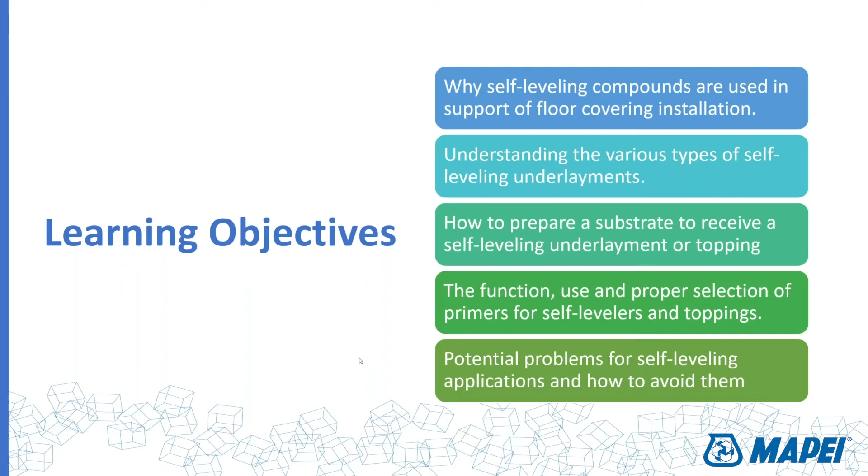So first and foremost, what is a self-leveling compound? This is a little bit of background information: it's either a cement or gypsum-based powder. When mixed with water or a polymer additive, it can create a flowable material like pancake batter, for lack of a better description, that can be applied to an irregular substrate to create a level, defect-free surface — all of which is extremely important for the installation of all types of flooring, whether it be resilient, carpet, ceramic, or wood. The flatter the floor, the easier the installation and the better the end result.

Typically, self-levelers are designed for high flow and long working times so that you can blend large areas together, and can be applied in ranges from a feather edge, to 1/8 of an inch, up to 2 inches, and sometimes 4 or 5 inches in a single application, depending upon whether or not you use an aggregate extension material. So it's a great solution for a wide variety of applications and circumstances for subfloor preparation — that's what self-leveling underlayments are for.

So first and foremost, why self-levelers? You may be wondering, why don't I just skim coat, etc.? The reason is — in my opinion, Jeff's rules, based on experience in the marketplace and working with contractors — there is no such thing as a flat floor.

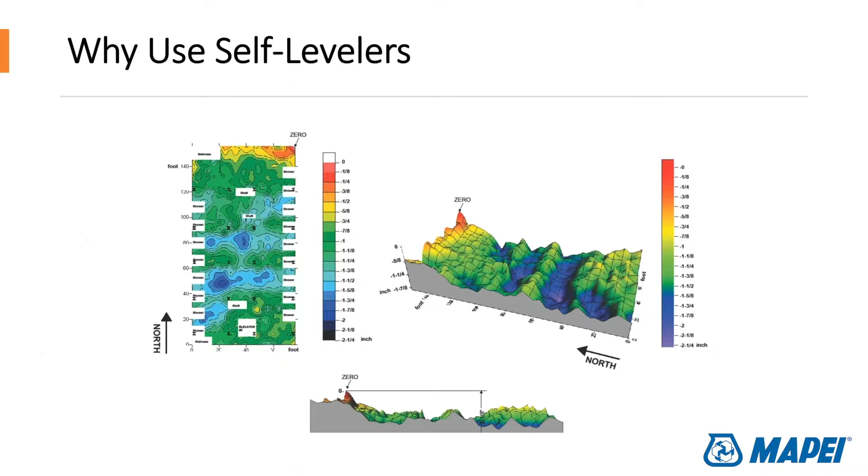But you might say, why can't I just skim coat that surface and be done with it? It's important to understand that skim coating, a very common practice in subfloor preparation, creates a smooth floor, not necessarily a flat floor. There are people who are very good at skim coat applications - they'll go across the floor with a 10-foot straight edge, mark out the bird baths and depressions, and come back with a hand trowel to fill those in. But at the end of the day, that's still not going to be a super flat, laser-level type of surface. It's still going to be undulating, versus a self-leveling application that makes things level. Skim coats make them smooth; leveling materials make them flat and level. That's the main difference.

Also keep in mind that skim coating is a time-consuming process. If you've done skim coating, you know you put one layer down, let it dry a couple hours, sand it, put a second layer down, let it cure another couple hours, and resand it. So there's a period of a day prepping a floor with skim coating compound - not to mention a lot of dust generation, cleanup, and being on your knees dragging material across the floor - compared to a leveling solution, which is a one-time application. The floor needs to be cleaned, then you pour it and place it, and it's finished and done, and you're installing flooring when it's ready. I think levelers are really a much better product for subfloor preparation going forward.

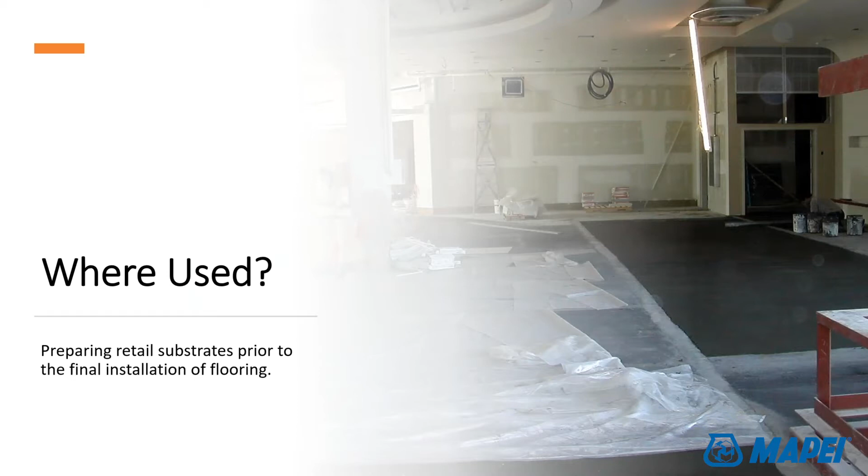Where are they used? They're used in a wide variety of applications: preparing retail substrates prior to final flooring installation, educational environments, gym rooms and classrooms, apartments, townhomes, condos, building out flooring installation. This photograph reminds me of a project in the Vancouver area - a residential tower project where the general contractor contracted with a self-leveling underlayment contractor. To save time in the installation process, he broom finished all the floors going up in concrete and had the leveler guy come by and finish them. We wound up with something super smooth, making it easier for the build-out - walls, doors, cabinetry installed without modifications. We saw great benefits doing that, versus having the concrete person finish the floor.

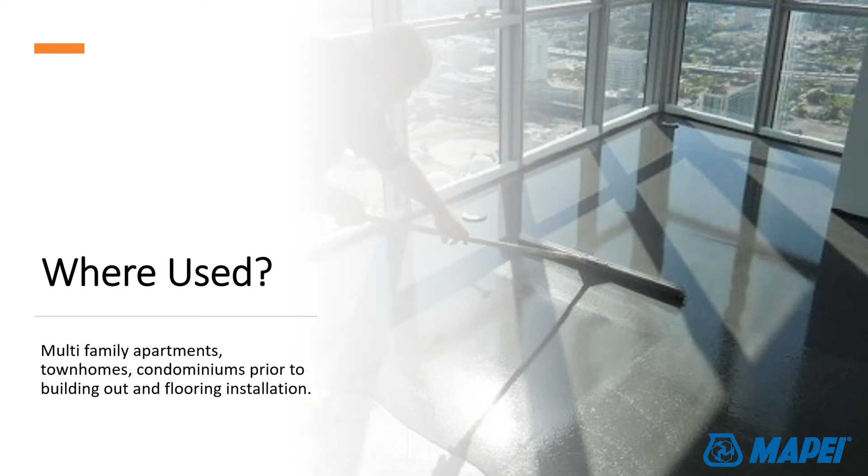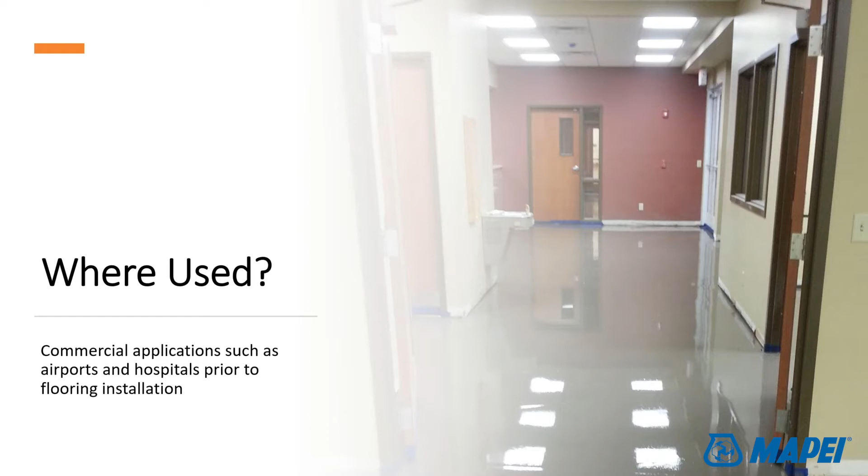Commercial applications as well, such as airports and hospitals, prior to floor covering installation. All of these applications have unique requirements in terms of what the self-leveling underlayment needs to do and withstand for the traffic conditions you're exposed to. For example, back to that residential application - if you're doing a home where you're just walking around in shoes and feet, the leveler needs to make things flat, but it doesn't need to stand up to massive heavy rolling load conditions. Like the screen you see here, a hospital environment - hospitals have extraordinarily heavy gurneys and beds rolling around on narrow wheels, putting a lot of pressure on the substrate. So you need something capable of withstanding that kind of pressure. Having said that, those are some of the points we need to discuss in navigating through all the choices for self-leveling underlayments.

So what are the various types of self-leveling underlayments, and where are they used, and what are the differences between them? Generally speaking, the world of self-leveling underlayment products is broken into three different kinds of chemistries. All of them are designed to be mixed with water to create a finished product, but they work from different chemistry bases to start with.

The first one we talk about is gypsum. This is a self-leveling underlayment that's very commonly used in multifamily housing because it has unique fire retardant capabilities, and it's a relatively inexpensive product that can be mixed with sand on the job site. One important thing to note: it's the same kind of material that would be used as a plaster cast on your arm if you broke it. Very fast drying, very tough and durable.

But one thing you must keep in mind with gypsum underlayments is that they are extremely moisture sensitive. They cure by evaporation—the water in the mix has to evaporate in order for a gypsum underlayment to function. It's not trapped like in a cement-based material, which we'll talk about in a second. It must totally evaporate. So if you're applying a gypsum underlayment in a thin application, say 1/8 or 1/4 of an inch, you'll have a relatively quick drying process. If you're applying it at 2 inches thick, all that water has to evaporate, and that can extend the dry time quite a bit—up to weeks before it's completely dry, depending on thickness.

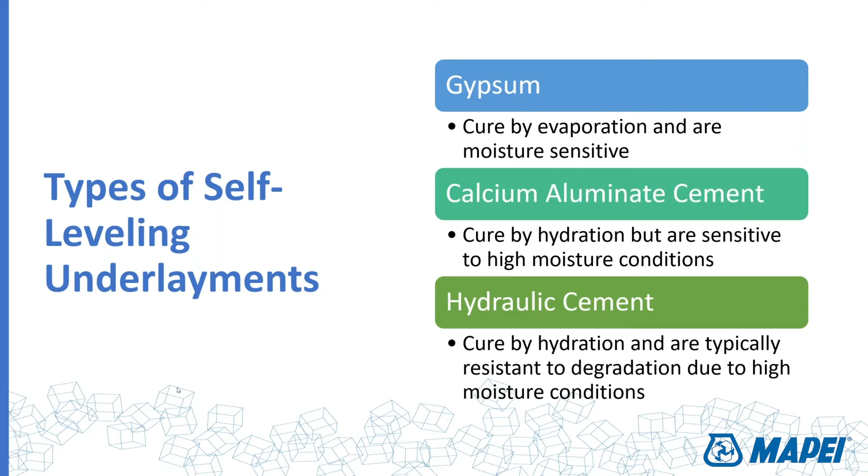And that's where hydraulic cement materials are used. This is almost the same as Portland cement. They actually cure by hydration and will get stronger on exposure to continued moisture. So those are the three types of cement-based products, or chemistries, used to make a self-leveling underlayment.

In the MAPEI product portfolio, we have products in all of those categories. When we talk about gypsum levelers, we have two in the product portfolio: Planitex SL and Planitex SLF.

Planitex SL is an unmodified, high flow gypsum self-leveling underlayment—extremely smooth and fluid to use, recommended for above grade applications on a wide variety of substrates. You can add sand to this to extend it, increase its performance characteristics, and reduce overall cost. We recommend adding MAPEI Sand Fine to this—a 40-pound bag of MAPEI Sand Fine mixes perfectly with two 50-pound bags of Planitex SL. Again, same great flow properties, easy finishing, and a great product for its intended use.

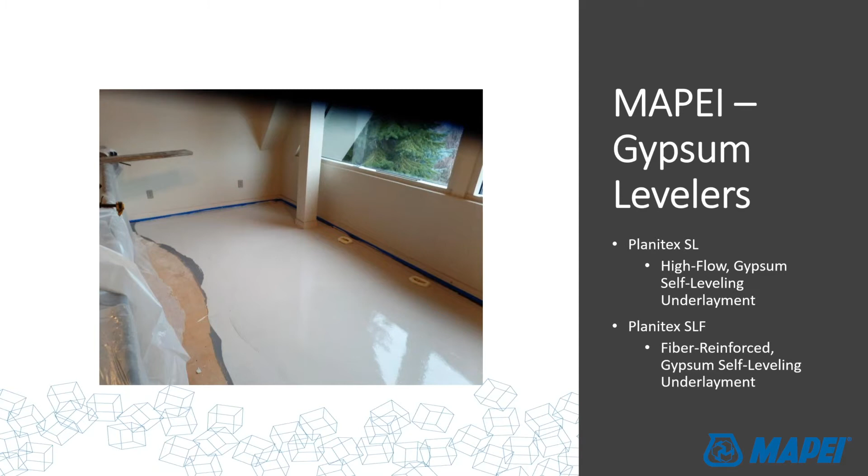Planitex SLF is based on the same gypsum chemistry, but is a fiber reinforced material. The fibers, if you look at them, are relatively long—maybe 1/4 to 3/8 of an inch in length—blended through the formulation, which makes this an extremely durable, flexural-resistant self-leveling underlayment. Again, perfectly designed for use on wood substrates as well as above grade cement-based substrates. So those are our two gypsum-based products.

As I mentioned before, in our calcium aluminate cement-based levelers we have the majority of our product portfolio, and we have quite a few of them here—almost, let me get my quick count, 10 self-leveling formulations in the calcium aluminate cement leveler base. Why do we have so many of them? Because there are a wide variety of uses, demands, and overall requirements for these products to work.

We begin with Novoplan SP, which is our standard performance self-leveling underlayment. This is a great product for base grade installation leveling applications, compliant with ASTM F710 requirements of 3,000 PSI or greater, a great price point, great flow properties, and a basic entry-level self-leveling underlayment.

We follow that with Novoplan 2 Plus, which is a little bit faster setting, a little bit more robust. Novoplan Easy Plus is a shrinkage-compensated leveler that doesn't require shot blasting or profiling.

Novoplan DPL is the deep pour leveler, a product we just recently introduced that can go up to 4 inches in a single application, which is incredible. There are people who have had needs to put self-leveling down up to 2 to 3 or 4 inches at a single time, and there are issues with other formulations being able to do that. This is specifically designed for deep pour applications.

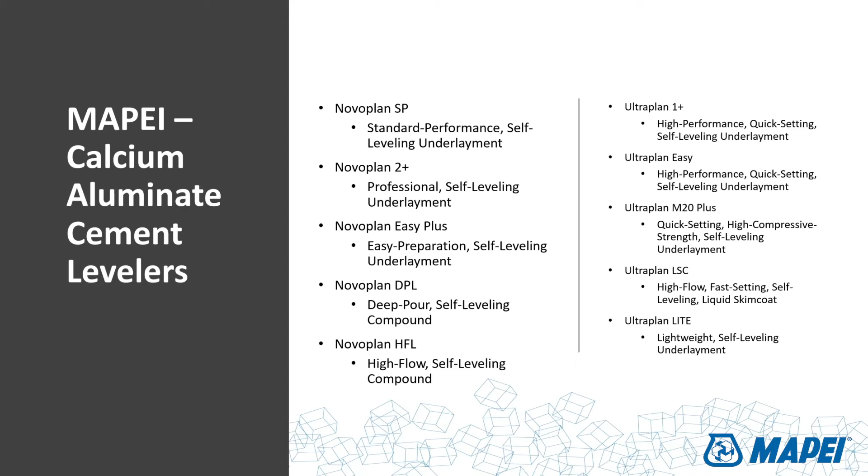The second to last category we have is hydraulic cement levelers, which would be our UltraPlan Extreme 2. This is a weather-resistant, high compression strength self-leveling underlayment that you can use in an uncontrolled environment—something that doesn't have doors and windows installed, where the HVAC systems are not operating.

It's a very robust leveler that we recommend for use in what we call go-early systems. Go-early would be an application in early construction, where the floor hasn't been fitted out and the plumbing and air conditioning have not been installed in the building. This is the only one we recommend for that kind of application.

You can install it and 6 hours later it could be rained on and nothing will happen. It could be flooded over by sprinkler line breakouts or whatever you want to call it—it's unimpacted. That's the reason UltraPlan Extreme 2 exists.

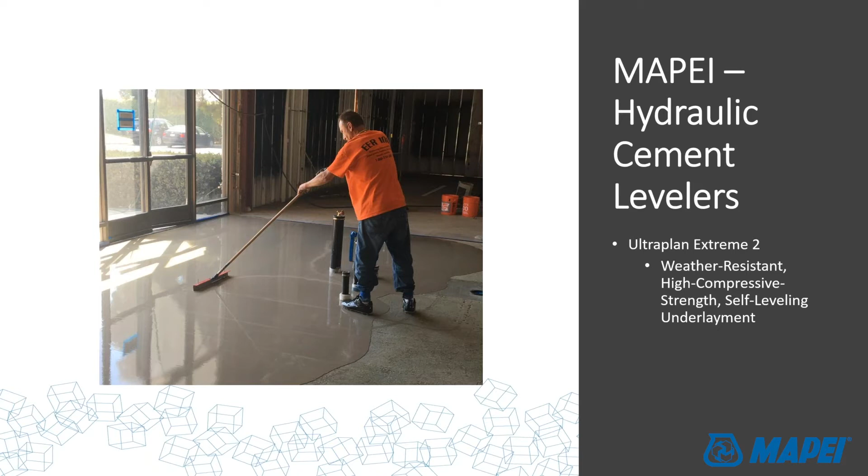The last one we have in our portfolio is Polyplan RSL. This is a unique product in that it's not mixed with water—we provide a latex additive instead. One of its unique characteristics is that it can be used directly on top of non-porous substrates without the need of a primer.

So if you're a contractor on the webinar today looking for primerless solutions—because primers take time to dry and are an additional step—Polyplan RSL is the way to go. They're extremely fast; this one, once applied, is ready for sheet vinyl installation 3 hours after application.

You can see in this photograph you can actually watch this one cure in front of your eyes. It happens about an hour and 15 minutes after application. The whole thing starts to gel over and harden up, and 2 hours later it's rock solid and ready to go. The whole goal on this one was for application directly over epoxy moisture control membranes without the need for an additional primer.

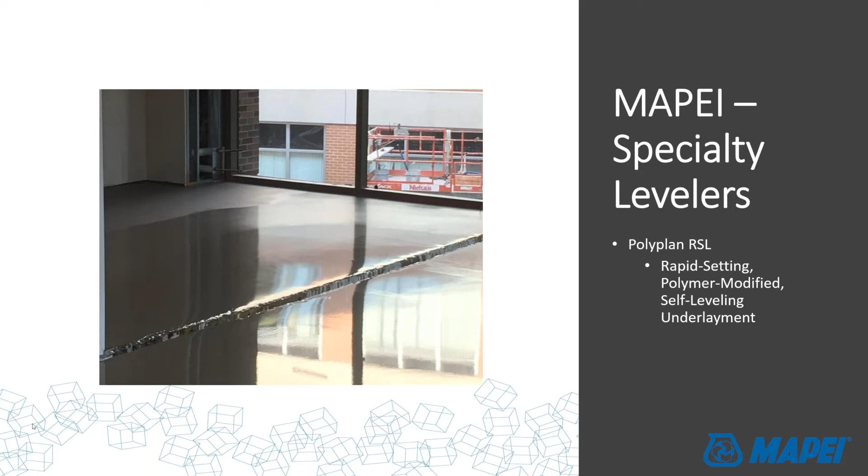So that is the last one we've got in terms of our product portfolio. So what are the differences between all of those? What we typically look for and observe, and some of the choices you'd want to make when selecting one leveler over another, are flow properties, dry time, compression strength, and depth of fill. There are a few other measurements on our technical data sheets, but I think these are the main four that are most important to you as the contractor or installer.

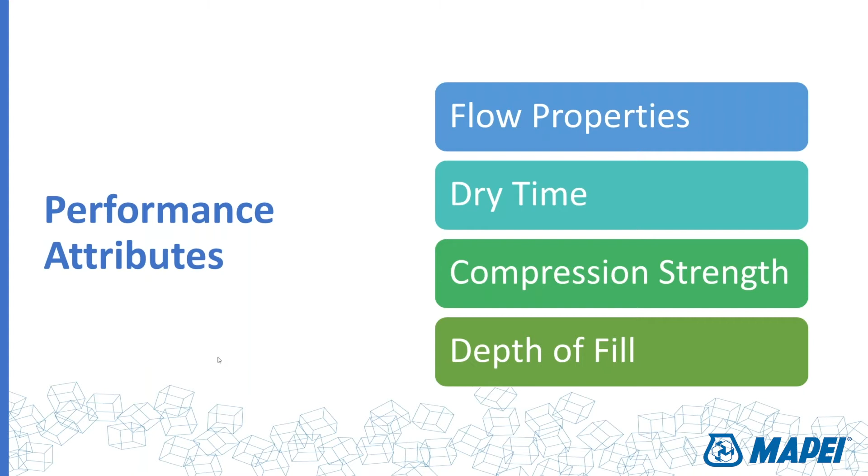Let's start with flow properties. Flow is a very interesting measurement - again, not something we typically publish on our technical data sheets, but something you need to be aware of. When we design and develop self-leveling underlayments, part of the design matrix for R&D people to work with is certain numbers of flow properties.

The flow property test in the lab begins with a small cup of mixed material, which is placed on a glass sheet. The cup is pulled out. The cup doesn't have a bottom to it, and when that cup is lifted up, all that leveler flows out, and we measure how far it flows across the glass sheet. So that becomes a flow measurement. Not only do we measure how far it spreads, but we also measure how quickly it flows.

So this slide gives you a visual representation of four of our products' flow properties. You're looking at Novoplan HFL, UltraPlan 1 Plus, Novoplan 2 Plus, and UltraPlan LSC. When I click the button for start, you're going to get a visual representation of how these things work. Hopefully that worked, hold on.

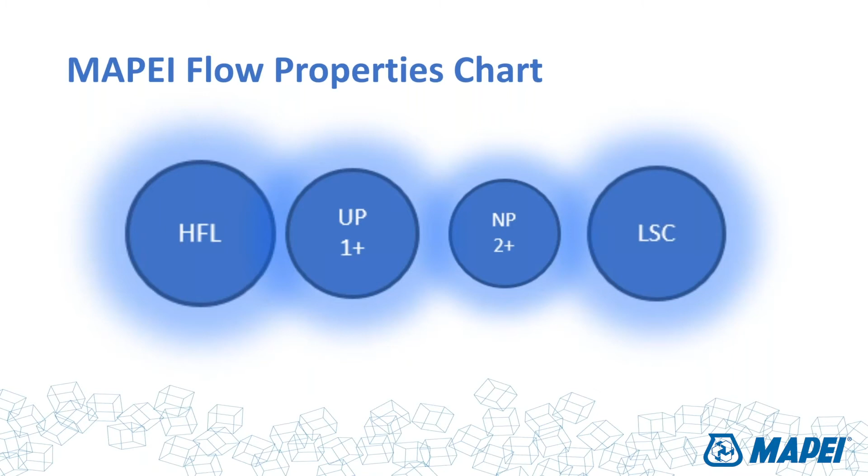Here we go. As you can see, the Novoplan HFL spreads quite rapidly to a much larger film versus UltraPlan 1 Plus, versus Novoplan 2 Plus, versus UltraPlan LSC. You get a little bit of a visual representation. HFL, as I mentioned before, the new one we've just added, is a very fast flowing fluid material and spreads quite a distance. If you don't need the speed and you're worried about placement and need to build thickness up, you might want to select Novoplan 2 Plus instead, since it's a little bit thicker, a little more difficult to spread versus UltraPlan 1 Plus. UltraPlan LSC has a very similar flow number to HFL, but it takes a little bit longer to get there. So HFL, very fast, very speedy.

Another important aspect of our self-leveling underlayments is the wait time before floor covering installation. Typically we give you two numbers: one is for the installation of ceramic tile or non-moisture sensitive flooring, and another is the time required for moisture sensitive flooring. The reason for those two numbers is that ceramic tile installation typically uses a mortar bed, and it doesn't really matter whether there's any residual moisture left in the self-leveling underlayment - it won't affect it so much, whereas that residual moisture would create a problem for a moisture sensitive floor covering or a water-based adhesive. So that's why we have those two numbers in place.

So here you're looking at a chart that shows the dry times or suitability times for many of our levelers for those two different types of floor covering. What I do want to mention - going back to the discussion about gypsum underlayments - the Planitex SL and the Planitex SLF have a kind of vague number there, and that's on purpose because it really depends upon how thick you apply it. If you apply it at a 2-inch thickness, that dry time is going to be on the order of 1 to 2 weeks before you can get on it with any kind of moisture sensitive flooring. You must let that product dry before you get to it. Again, if I'm down to a 1/4 inch or 1/8 inch application, that's a whole different number.

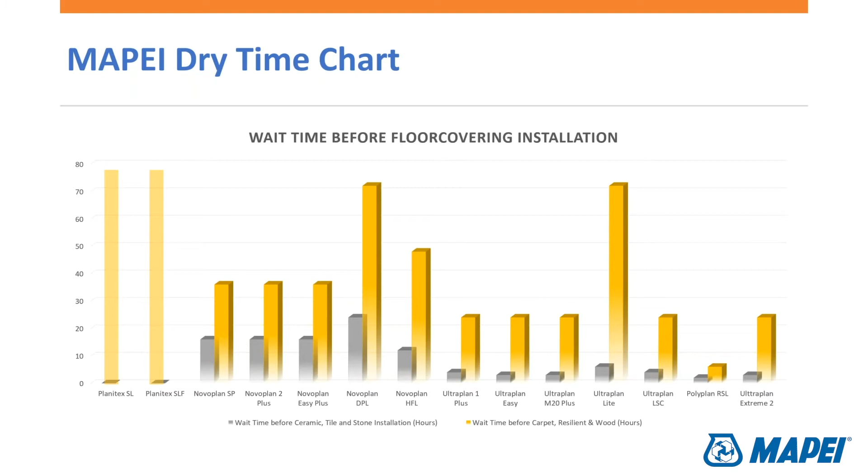Compression strength is another thing. What is the type of traffic conditions and heavy rolling loads that I'm going to be exposing the floor to? And again, if you take a look at the number that's provided by the ASTM F710 requirement, which is typically 3,000 PSI, virtually all of our levelers are above that number.

But if you need something to handle heavy rolling loads in a hospital environment, perhaps even in a casino rolling money across the floor in heavy carts, or a warehouse floor that you're running forklifts and hand trucks across, you would want to select ones that are higher compression strengths.

So surprisingly, and you may not think about this, our Planitex family has some of the highest compression strengths out of the whole family. So don't exclude the thought of using a gypsum underlayment on above grade installations just because they're gypsum. They are high performance products. They've got great flexural strength and extremely high compression strength and are very easy placement products to deal with.

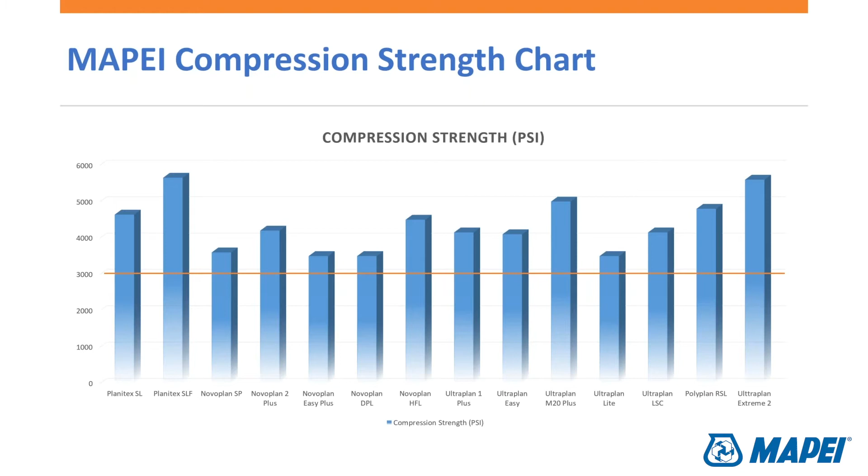Keep in mind that they do have that time constraint for dry time, so you have to dial that into your equation. Obviously, the UltraPlan families are a little bit higher compression strengths than the Novoplan families. We're getting a little bit fuzzy with UltraPlan. Novoplan HFL is a high compression strength product. But again, these are some of the attributes that you would consider in terms of navigating which type of leveler to pick.

Depth of fill is another important aspect as well. And again, single lift application ranges for our levelers. This number is given to you as if you were going to apply it neat. In other words, you're not mixing it with any aggregate. It's just the product by itself. And we typically do limit the application of these products to certain depth of fill for a reason, most of which has got to do with the heat generation during the curing process.

Many of these levelers, all of these cement-based levelers, do generate heat as they cure. The thicker you apply it, the more heat is generated, and we're trying to avoid having that heat create a situation where the leveler expands too much and blows off the floor.

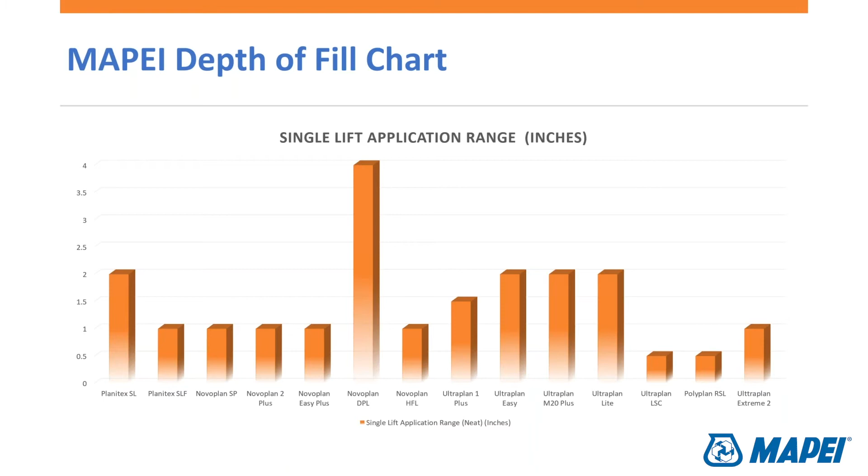But here you'll see the depth of fill for these levelers in their neat application, all of which can be extended with aggregate up to 5 inches of fill based on how much aggregate and the size of aggregate that you're using, with the exception of UltraPlan Extreme 2, PolyPlan RSL, and Novoplan DPL.

All right, so preparing the job site is important for all of these levelers. If you're dealing with concrete, you must check for moisture content using ASTM F2170 and ASTM F1869.

This is one of your navigational points, if you will, for determining which leveler I can use. Most of our levelers are set up for a limit of 5 pounds and 80% RH. Novoplan HFL is a new one introduced at 8 pounds and 90%. Ultraplan Extreme 2 has no limits. So you've got to make sure you're doing your proper testing for that.

Check for structural integrity. If the floor has additional flex beyond L/360, you're pretty much going to limit yourself to looking at Planitex SLF that has the ability to handle that flex. But you want to make sure your substrate is strong enough to support what you're dealing with.

Check for the presence of curing compounds, sealers, and other contaminants. This is a big problem for self-leveling underlayments. Those curing compounds must be removed, and you're dealing with a pure surface to stick to. Primers and levelers bond very well to curing compounds and sealers and other contaminants. The contaminants do not stick very well to the concrete. And so if you're trying to avoid hollow spots and delamination, all that stuff's got to be taken away.

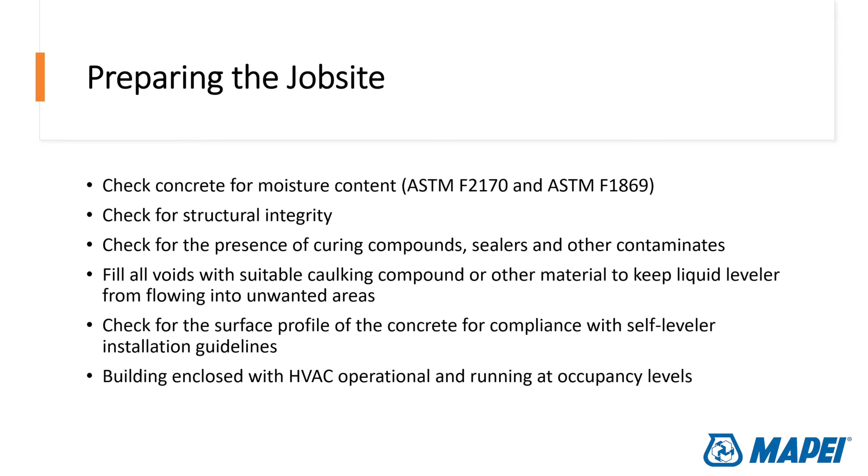Check for surface profile. Many of our levelers and primers require some sort of profile for functionality. Some do not. Any of our levelers that have the word easy in the name do not require a surface profile, but everything else typically does require some sort of preparation to a CSP of 2 or 3. And the building must be enclosed with an HVAC system operational, running at occupancy level. So all this stuff is important.

The types of substrates we deal with are concrete, and I refer you to the ASTM F710 standard. A lot of information is there for how that concrete needs to be prepared and set up. If you don't have this standard, I highly recommend you get to the ASTM website and find them. For wood, there is a standard practice for panel type underlayments to receive resilient flooring. That's another great one to have that talks about the type of wood being used, how it's supposed to go together, what kind of flexural strength needs to be involved, as well as a standard for gypsum. So all of these are very good to have in your reference file. If you don't have them, I would highly recommend you get them.

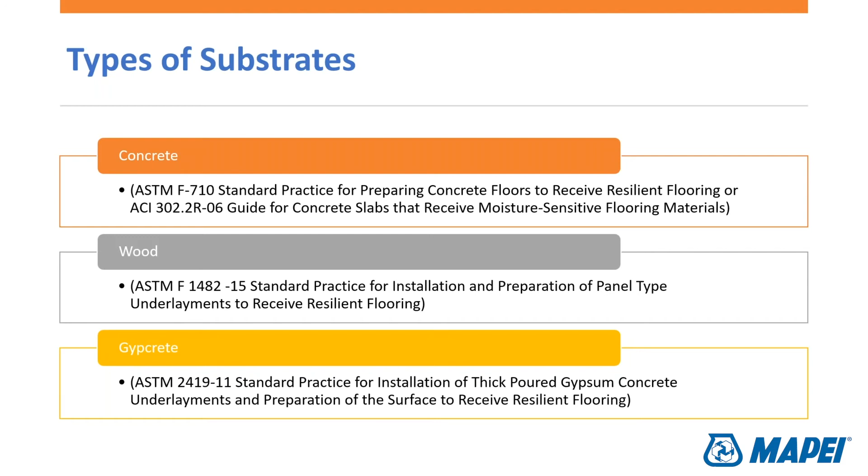There is, believe it or not, an ASTM standard practice for the installation of self-leveling underlayments and the preparation of the surface to receive resilient flooring. Again, another good standard to have in your box of resources when you're dealing with how to prepare them.

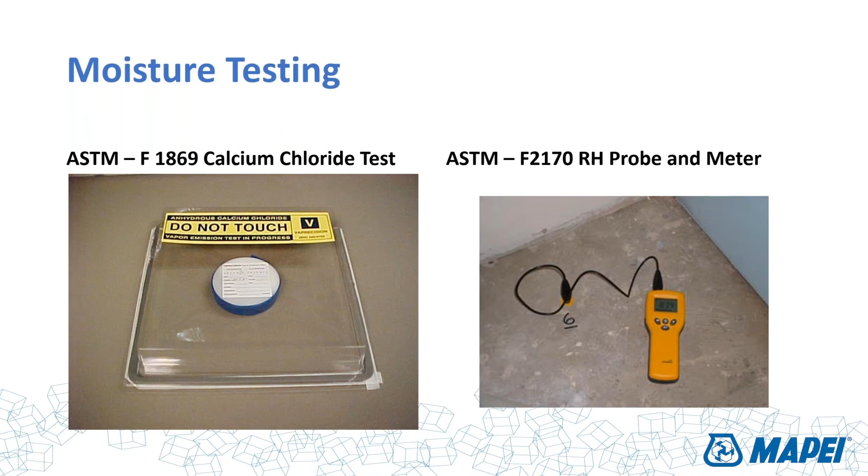Again, moisture testing is typically all done by these tests. I don't think we need to spend much time talking about them here, other than to say that these tests are worthless unless you properly prepare them, the HVAC systems are operational, and you're doing them according to the test method requirements. If you're trying to do an RH probe test and the walls are not up and the windows are not up, you're wasting your time. And the same is true for the calcium chloride test. These tests are only valid if the building is enclosed and the air conditioning is running. So do keep that in mind. But that is a navigation point for which leveler to use when you get that information.

If those results come back and you have a high moisture reading beyond the limits the leveler can take, then you've got to consider the installation of a moisture mitigation system. That's for another presentation as well. But generally speaking, there are a couple choices: a 2-component 100% solid epoxy system, our Planiseal VS and VS Fast, which are ASTM F3010 compliant. If it's not super wet, you can use some of our 1-component water-based polymer solutions for mid-range moisture conditions like Planiseal MSP. And in some conditions you can also use our 1-component polyurethane system, Planiseal PMB, as well.

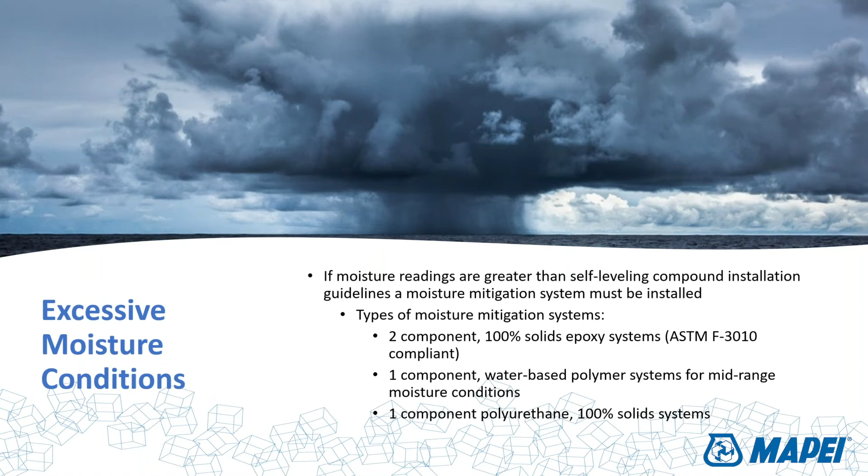So those are the solutions for getting that kind of done. Creating the profile is extremely important, probably more so not just necessarily for creating texture, but to get the floor clean. Again, many failures that we deal with on a self-leveling underlayment application are due to improper subfloor preparation. A sealer was left on, there was oil residue left on the floor, taco sauce in a corner that spilled. These kinds of things are going to create problems for the bond of the primer. And when that is a problem, then we have a failure.

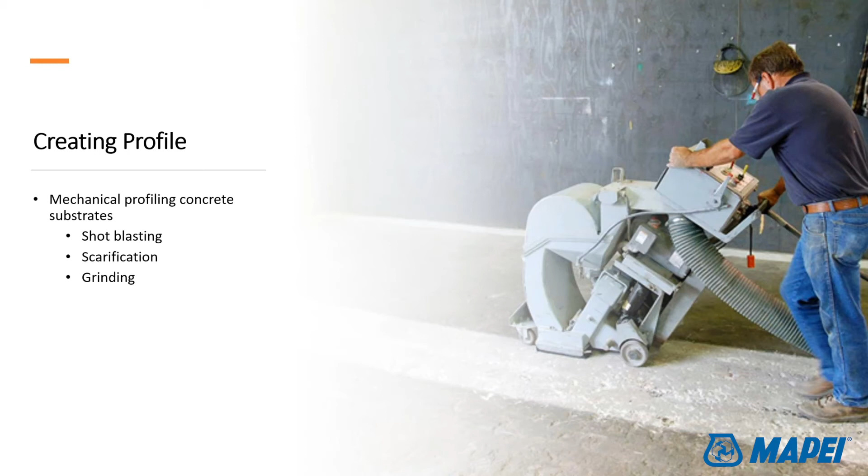So there are a variety of methods for creating that profile. Our International Concrete Restoration Institute has got some great recommendations. If you look for that chart and that information for self-leveling, we're trying to get to a CSP of 3 or 4 for most of that. Look at our technical data sheets. I think for the most part, we're looking at a CSP of 2 or 3. All of which can be achieved by grinding, shot blasting, sandblasting, and scarification.

A little bit of a myth correction, if you will, for MAPEI. Sometimes I've been told that people believe that our only solution for preparation of a concrete slab is shot blasting. That is not true. We recommend and endorse grinding, shot blasting, sanding, whatever, as long as it achieves that CSP requirement that we're requesting and that it's properly cleaned and there's no dust residue left on the floor, we're perfectly good with that. So do keep that in mind, that there's a variety of different methods for preparing a floor to receive a self-leveling underlayment.

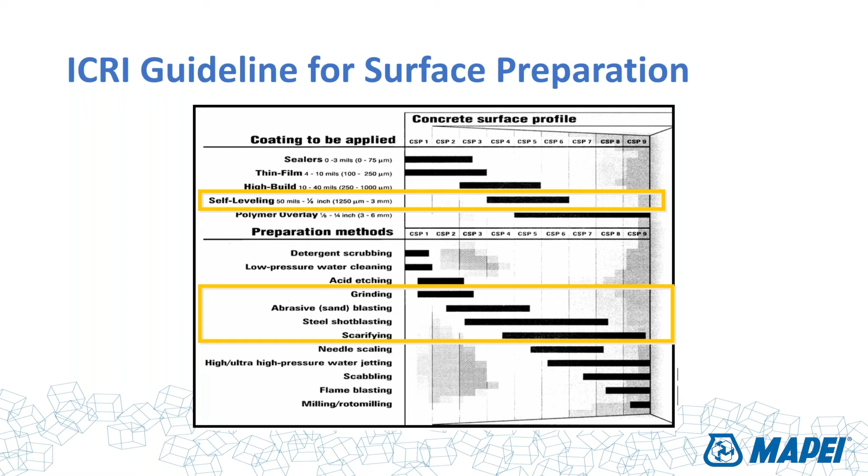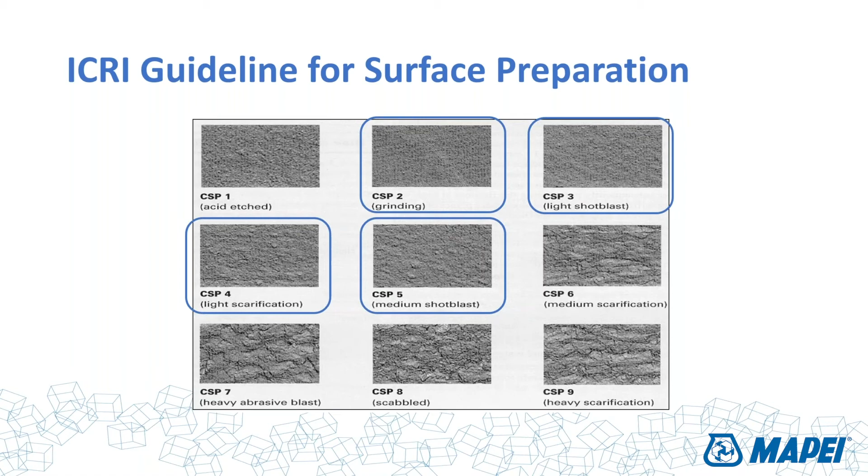At the end of the day, your concrete needs to be clean, pristine, and looking like, I don't know how to explain it other than it looks like 100 grit, 120 grit, or 80 grit sandpaper on the floor. Some clean texture for which everything needs to bond to. Cracks also need to be repaired, as I mentioned before, purely because of keeping the leveler from flowing through that concrete crack into the areas below. That's not a good situation. And sometimes these cracks are structural and need to be addressed as well.

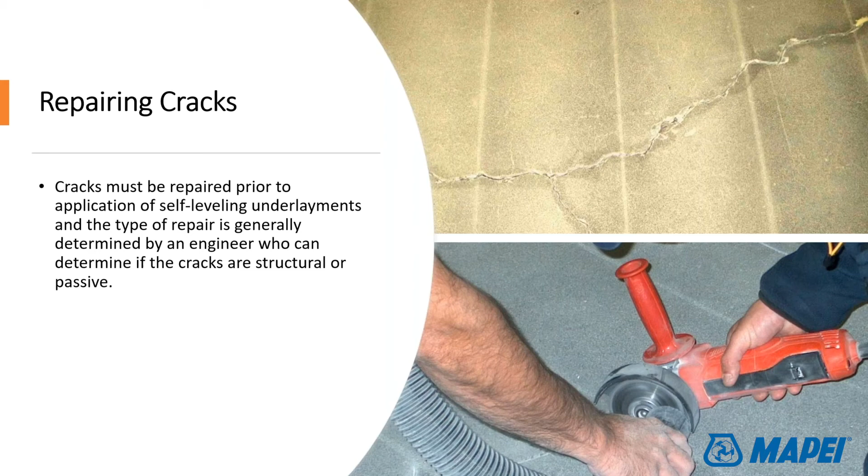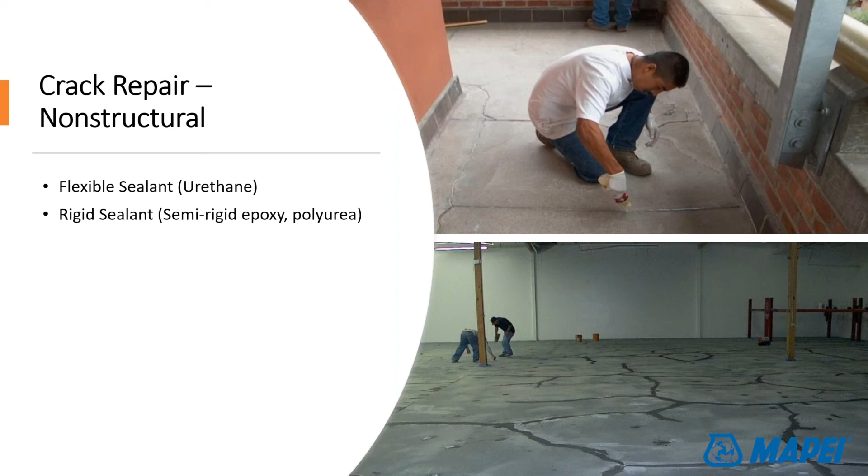So whenever you get on a concrete slab that has cracks throughout it, a structural engineer should be involved to take a look at that and see whether or not they are active cracks that need to be dealt with in a unique way, or if they're just cracks that can be fixed with normal application, normal remedies. If it's a non-structural type of repair, you can go into that with a flexible sealant. Semi-rigid, we have things like Planibond JF to fix some of these. Planibond EBA with sand can be used for this as well. Sometimes they can even be filled with a patching compound prior to the application of a leveler if they're non-structural. If they're structural and are moving joints, then we need to figure that out a little bit differently.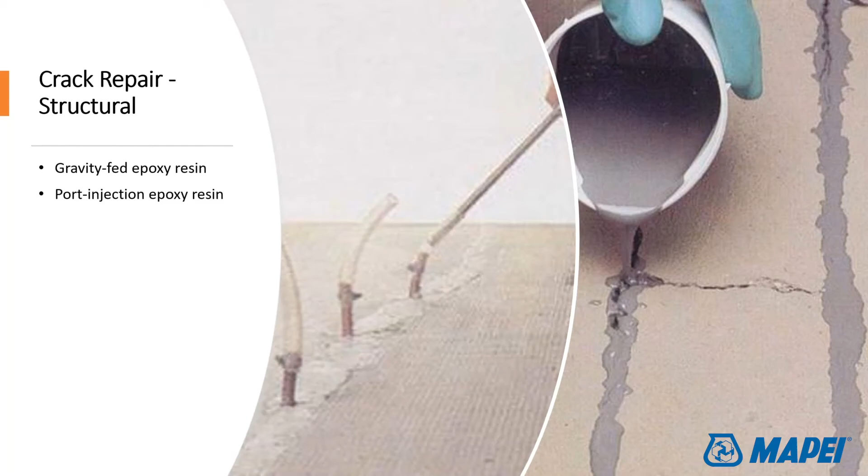Gravity fed epoxy systems, port injection epoxy, all this kind of stuff to lock that together to make that a suitable substrate for bonding a leveler. Again, these things need to be reviewed and dealt with by a structural engineer to make sure that that is the right solution for what you're dealing with. So, having said all that, how do you navigate through the choices of self-leveling underlayments for your particular project? Just like a buoy is a navigation point for your sail on the ocean, what are some of the buoys that you have for self-leveling selection?

As I mentioned previously, if your project is not fast tracked and you have time and you're working on a budget, to be honest with you, then you could look at our Novoplan family or our Planitex family, which is a little bit slower setting, a little bit more generous and forgiving to the wallet, if you will, as opposed to something else. If your project requires a rapid turnaround, then you're looking at our Ultraplan family.

If your project has weight load issues, if you're dealing with a cantilevered concrete slab or an old antique concrete slab that's not capable of taking the full load of a 2-inch normal self-leveling application, then you would take a look at Ultraplan Light for that application. If your project is going to wind up being a warehouse floor straight with no other floor covering on top of it, our only solution for that is Ultraplan M20 at this point.

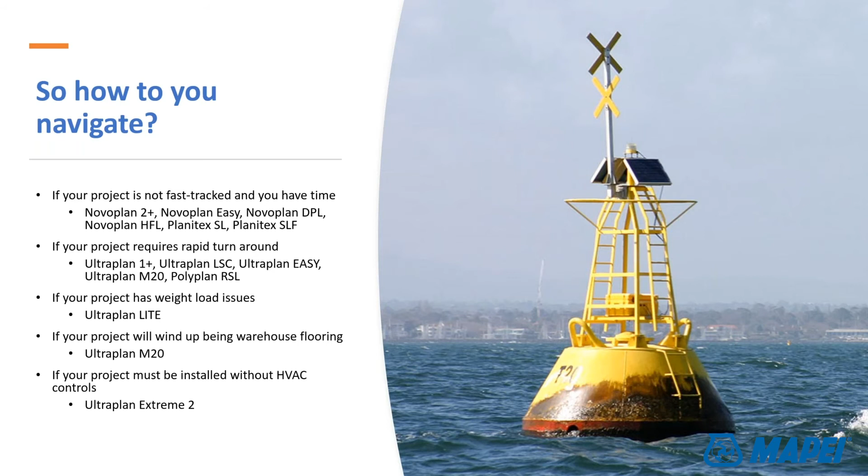If your project is installed without HVAC system controls, or the windows and doors aren't in, and it's a wide open building, even if it's going to be curtain wall type construction, and you need to get the slab straightened out and the glass isn't up yet, your only solution for that is UltraPlan Extreme 2.

If your project is wood-based and has flexural issues, or if you're dealing with an existing multifamily housing project with a 2-inch pour gypcrete that's cracked up and looks like the surface of Mars, Planitex SLF is the perfect solution for that.

If your project is over an epoxy membrane and you don't have time for the primers to dry, then Polyplan RSL is your solution. If your project requires a deep fill application, then Novoplan DPL is the way to go.

If your project is exposed to heavy rolling loads, you're looking for products that have high compression strength. So any one of those products will work for that.

If the project has to be done in 3 hours or less—which, if you're thinking about an operating room rehab, for example, in a hospital environment that requires moisture mitigation, and they need to get that operating room back into service because that's a big money maker for the hospital—Polyplan RSL is the way to go for that as well. Okay, so those are some of the navigational points for self-leveling underlayment selection.

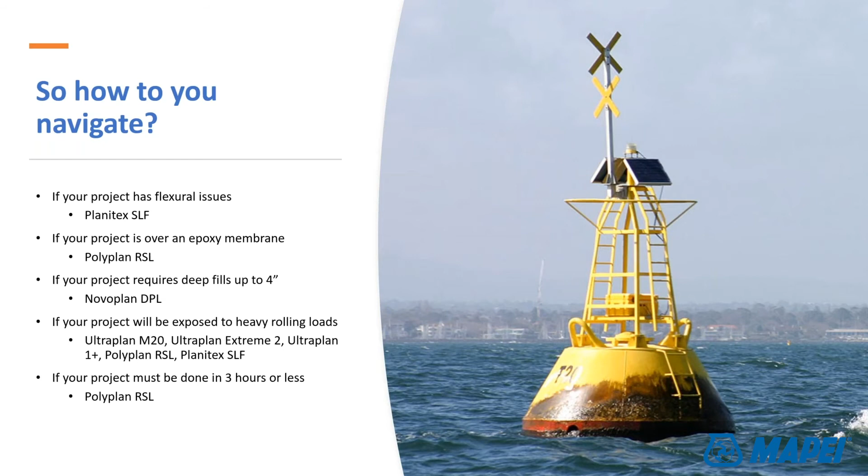Having said all that, there are a few other points that are a very important aspect of self-levelers that we need to address, because you can't really say self-leveling underlayment application without involving a primer. These two things go hand in hand, like a ham and cheese sandwich. You've got to have both of these things involved.

So we've got to deal with the primer choices as well, and there are quite a few of those to deal with, and in their own sea, if you will, of selections and different types of materials to go with as well. So what is the function of a primer?

First and foremost, to create a uniform substrate for the leveler to bond to. Yes, we have gone through the process of making sure that concrete is smooth, clean, free of any sealers and debris, but we still need to make sure that's consistent throughout. So the only way to do that is to apply a primer of one form or another to make sure that's the case. The other aspect of it is that it seals off that substrate to reduce off-gassing or pinholes from forming.

What do I mean by that? If you have an open concrete slab or even a piece of plywood that you're working with as a substrate, and you pour a liquid material on top of it, that liquid's going to go into any kind of pores and openings in that substrate. And when it does that, the air that was in that pore is going to come up through the leveler and create pinholes and eruptions—volcanoes, if you will—on the surface of that leveler.

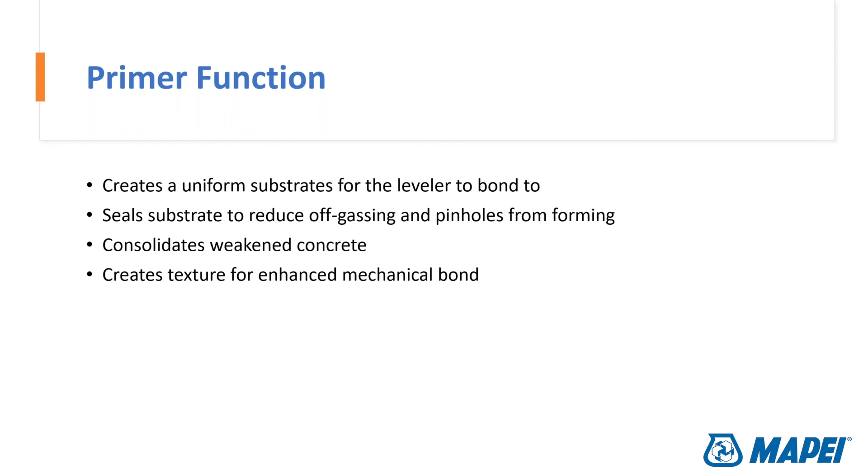A little bit about the chemistry of them: many of our primers, the bulk of the business we deal with today, are water-based acrylics for porous and non-porous substrates. They're smooth, easy to apply, paint-like in nature. Then we have water-based textured materials that have a built-in aggregate to them, creating that texture. Again, these are great solutions for today's environment, where you can't shot blast or create dust and debris in the shot blasting and scarification process.

Make sure the floor is clean and apply a textured acrylic, and you have your CSP, if you will. There are epoxy-based primers available for high performance applications. For example, if you're trying to create a warehouse floor exposed to heavy traffic, epoxy systems using sand broadcasts are the perfect choice. Plus we also have polyurethane materials using a sand broadcast for moisture control and bonding solutions as well. So there's a variety of different options for primer bases.

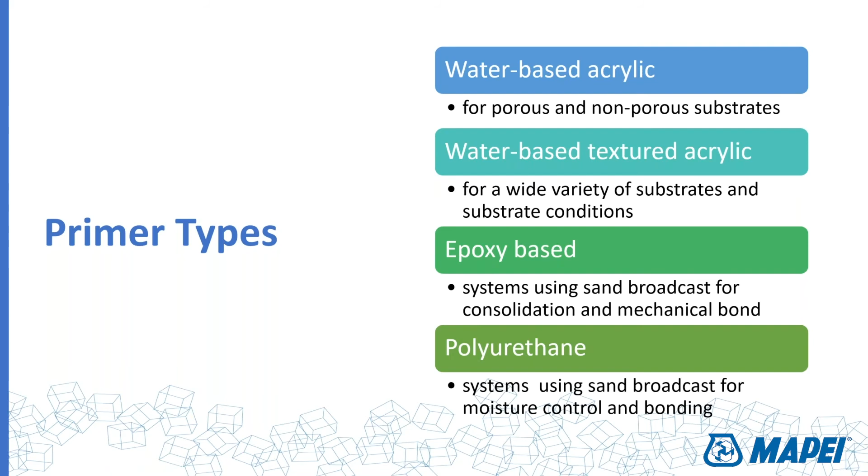So how do you navigate through all that? A little bit more about the details of them.

MAPEI's offering for acrylic primers is our Primer L. This is a workhorse for the MAPEI primer solution designed for use on porous concrete as well as gypsum materials. It is diluted 3-to-1 with water, so you've got a great value there. It does a great job. It does require a couple coats typically. It can be applied to porous concrete using a roller system.

But one thing I want to mention: if you are applying Primer L to a gypsum substrate, it's very important that you use a stiff bristled broom for that application. Do not roll coat it. That stiff bristled broom does a great job, and its only job is to break up the laitance of the gypsum surface and get that Primer L into it and blend into the surface to make sure you have a proper bond. Roll coating on top of a gypsum underlayment is very dangerous because it doesn't really get a chance to blend in with the dust on the surface of a gypsum underlayment, and can come off very easily. Just a sideline about Primer L.

Primer T is another workhorse for us. If you're not familiar with it, we had a color change on Primer T a while back. It's this nice, lovely magenta color you see on the side—a great way for you to determine whether the proper application is in place. So make sure you apply it properly.

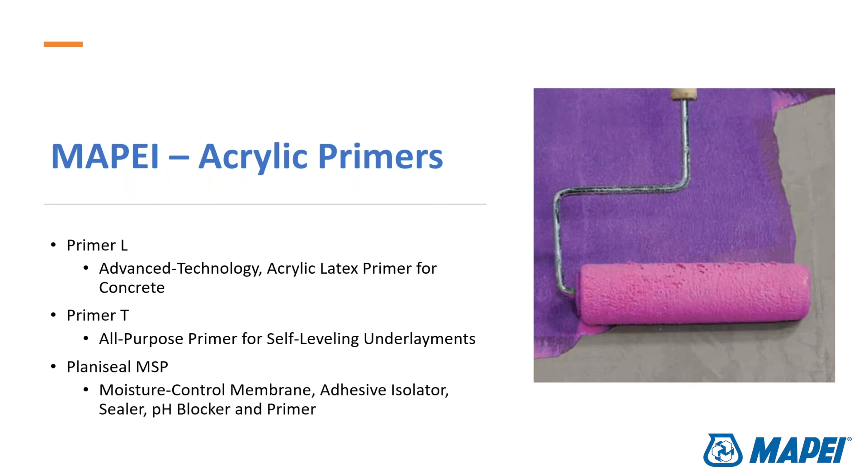Textured primers—again, what we're dealing with here is a primer solution that provides the texture you need for performance installations of self-leveling underlayments.

Primer X is a new one we've introduced to the offering. It's a fast drying texture primer specifically designed for application over epoxy membranes, but that's not its only use. It is textured, dries within an hour after application, and can be used over any non-porous substrate, particularly epoxy materials. It can work on high polished concrete slabs as well as non-porous concrete. So it's a very robust solution, very fast drying, and works extremely well for preparing a concrete slab to receive self-leveling underlayments.

Another one in our offering that's been around for quite a while is Eco Prim Grip. This is a great product for use over existing ceramic tile applications, other non-porous concrete applications, and over old adhesive residues as well. The main difference between the two is Eco Prim Grip requires a little bit longer dry time than Primer X.

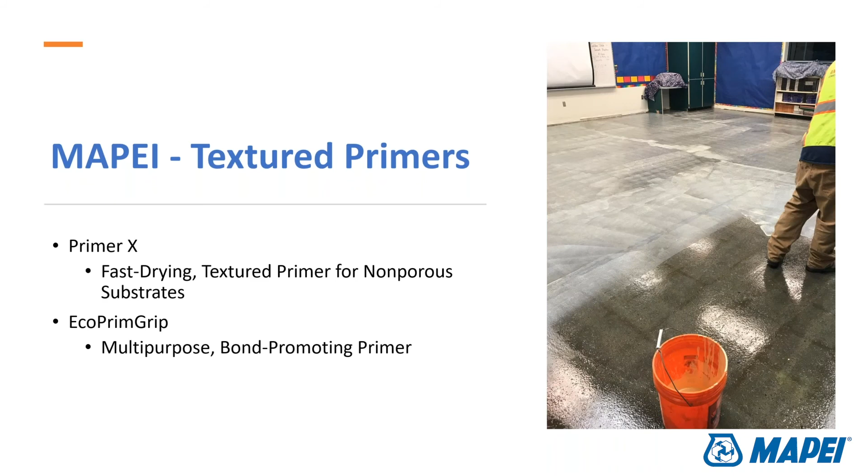Our epoxy primers—we have a variety of these as well, and these are not your everyday solutions, but when you're dealing with a high performance leveler application, that's when you need to get to these. Primer E is a 2-part low viscosity epoxy primer: mix part A and part B, and get it on the floor.

If you have a metal deck, or if you're dealing with an existing epoxy surface, these are great. This is a great primer to use. You apply it on the floor, sand broadcast across the surface with MAPEI sand coarse or MAPEI sand fine, get sand rejection, remove the residual sand, and then apply your leveler for higher performance applications.

Primer CE is a low viscosity epoxy that helps consolidate a friable concrete slab prior to the application of virtually anything. Primer WE is a water-based epoxy, and its claim to fame is that it can go over old adhesive residue without any problems, creating a very sticky primer base for all levelers, so it works over metal surfaces as well. If you're dealing with a problematic job site that's got all sorts of things going on with it, Primer WE is a great solution.

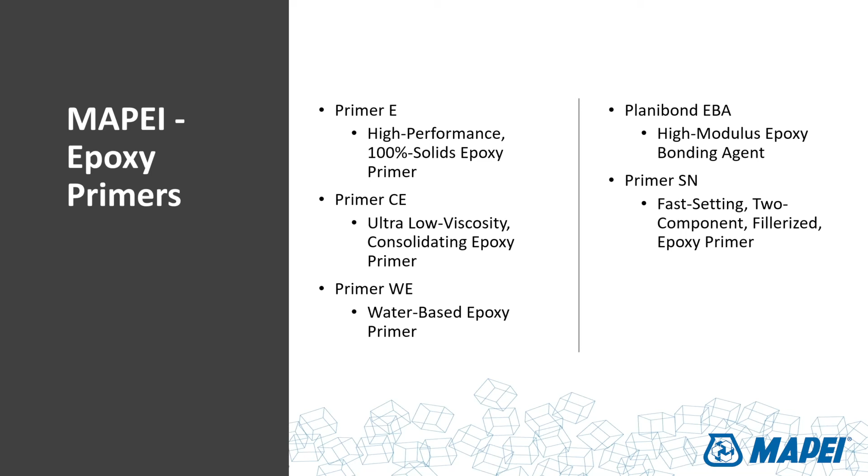A couple other choices: Planibond EBA and Primer SN. These products are specifically designed for use underneath many of our topping compounds, which is another subject entirely, so I'd ask you to get to our CRS folks for installation information on toppings. Planibond EBA and Primer SN are two high body, high modulus epoxy materials which also get sand broadcast in them, and are the only solution we have for priming underneath topping compounds, so something to think about.

The last one we have in our offering is Planiseal PMB, which is a 1-component moisture curing polyurethane applied in a double coat application with sand broadcast. This also provides moisture control up to 25 pounds and 100%, as well as providing a very strong bond for all the applications we've mentioned before.

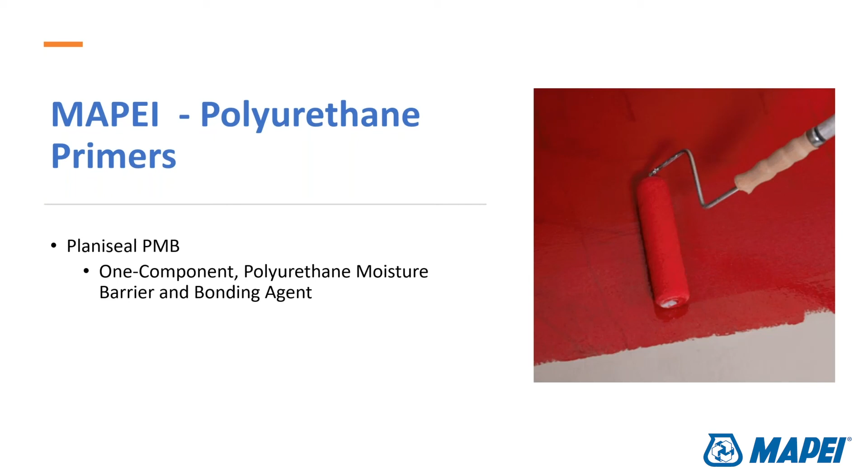So how do you navigate through all of that? If your substrate is a gypsum underlayment, you're really dealing with choices of Primer L or T. If your substrate is wood-based, it's Primer L or T, porous as well. If your substrate is porous concrete, you see the choices of L, T, or X. If your substrate is non-porous, we get a little more detailed, but we drop off L: Primer X, Primer T, Primer WE, Primer E with sand.

If your substrate is an epoxy membrane, if you already have something like Planiseal VS down, or you're dealing with any other kind of epoxy coating, Primer X is a great solution for that, or we go back to Primer E with sand. If you can't profile a substrate, shot blasting isn't allowed, you don't have the power available to you, or you're dealing with silica exposure issues, then Primer X or Eco Prim Grip is available as well.

Keep in mind the difference between the two of those is speed of dry. If your application is high performance, if you're creating something that's going to be a warehouse floor, if you're going to deal with something that's got heavy traffic, then I would look into the Primer E, Planiseal PMB, Planibond EBA, Primer SN, all of which need to have a sand broadcast system.

The difference between these, just to give you an idea of the numbers: if you're looking at a water-based solution, even our Primer X or Eco Prim Grip, Primer T, versus the bond shear strengths of an epoxy solution - typically a water-based solution or even our Primer X gives you slant shear values in excess of 450 to 500, 600 PSI kind of numbers. An epoxy solution, even the polyurethane solution, will give you anything in the order of 2,000 to 4,000 PSI compression slant shear numbers, almost 10 times the strength.

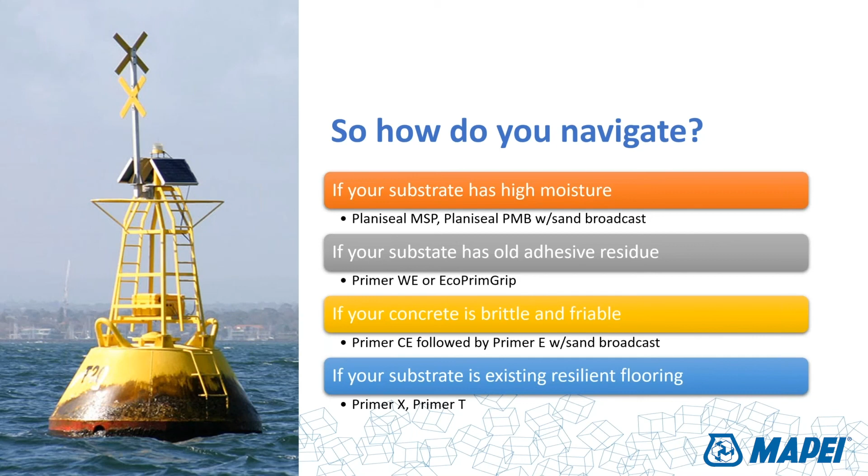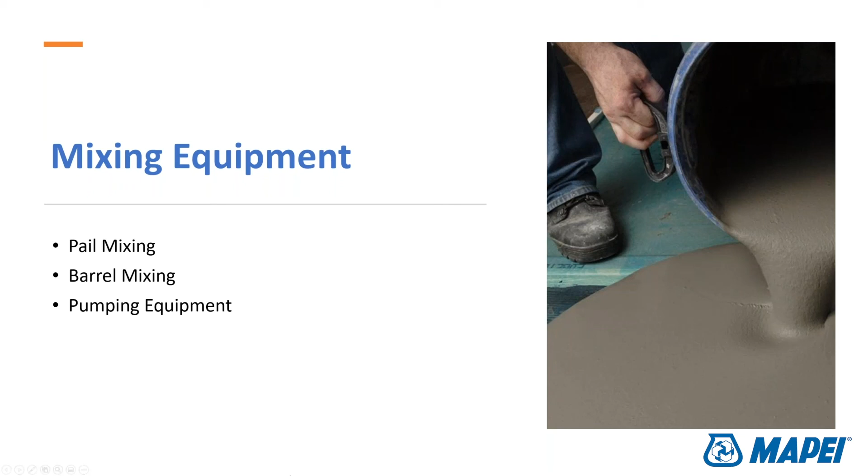Mixing equipment for levelers is pretty simple. You can mix it in a pail depending on how big the application is. For a small laundry room, a 5-gallon pail is probably adequate. For areas 500 to 1,000 square feet, barrel mixing is a great way to go. For areas 5,000 square feet or above, pumping equipment is really the way to work.

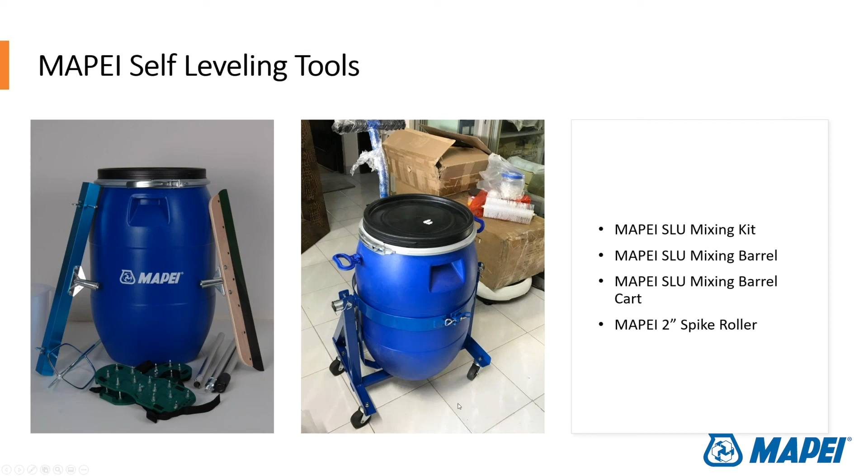MAPEI has equipment available to help with this process. We have a self-leveling mixing kit, which includes a gauge rake, mixing paddle, spike shoes, and smoother. We have a cart that carries that around and makes it easy to place, a mixing barrel, and a 2-inch spike roller available.

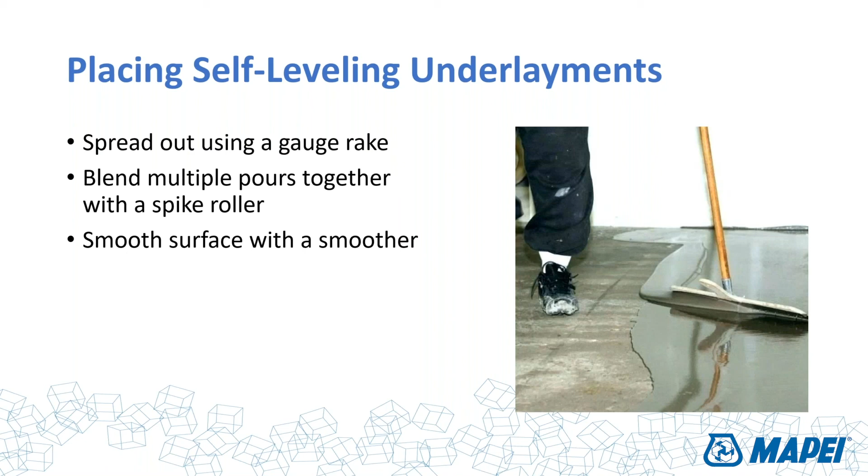Placing a self-leveling underlayment once the product is mixed is a little bit of a work of art, and there are people who know how to do this extremely well. You typically spread the pour out on the floor using a gauge rake set to the thickness you need, blending the pours together using a spike roller, and then finishing the surface to break the surface tension of the leveler using the smoother to make a nice smooth surface.

One thing that's very important about a leveling project is you need to get organized. I don't want to call this a Chinese fire drill, but it is a little bit of organized chaos when working on large installations. If you're dealing with a small 50 square foot installation, this is not that big of a deal.

You can mix a couple bags at a time, pour it on the floor, and get going. But if you're dealing with a large area, you need to spend time thinking about how to set up a mixing station and get that product on the floor in a consistent pour. Because once you get started, you really can't stop. It's kind of like pouring concrete at the Hoover Dam—you just keep pouring until the project is finished. As a consequence, you need significant thought on how to get set up to do that.

That requires thinking about where to put the mixing station, getting all the leveler bags staged and many of them cut and ready to open, close to a water supply. The water needs to be the right temperature with plenty of availability, all set up so you can mix consistently and easily, then get the material placed and move to the right job site where you need to go. So spend some time thinking about how that gets organized before jumping into a major leveler application.

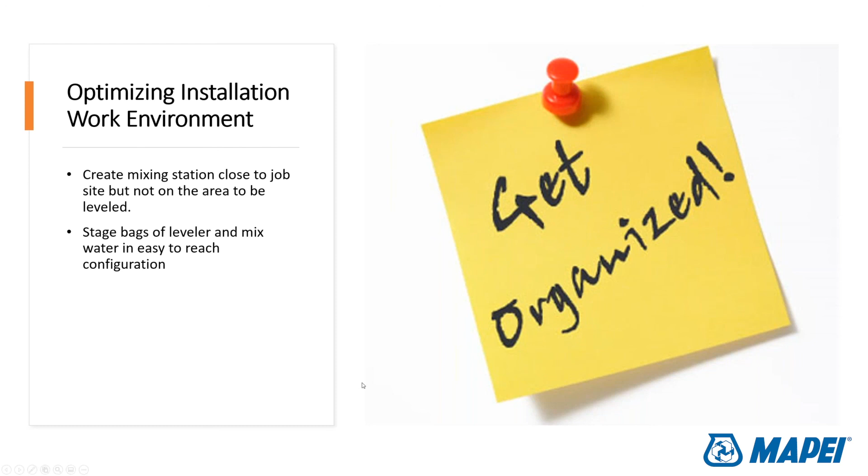Underlayment failures—why do things go wrong? I go back to reminding you of all the things we've talked about in terms of subfloor preparation. If you don't pay attention to that, these are the kinds of things that can happen that will cause a failure: improper subfloor preparation, a primer not used, or the wrong primer selected.

The primer was over diluted, for example, or didn't get enough time to dry. The substrate wasn't profiled, or the contaminants weren't removed. Those are all going to create a bond breaker for this very expensive material that you just put on the floor to make sure everything's nice and smooth. This is really about avoiding having to do this twice—make sure all those selections and preparation are done properly.

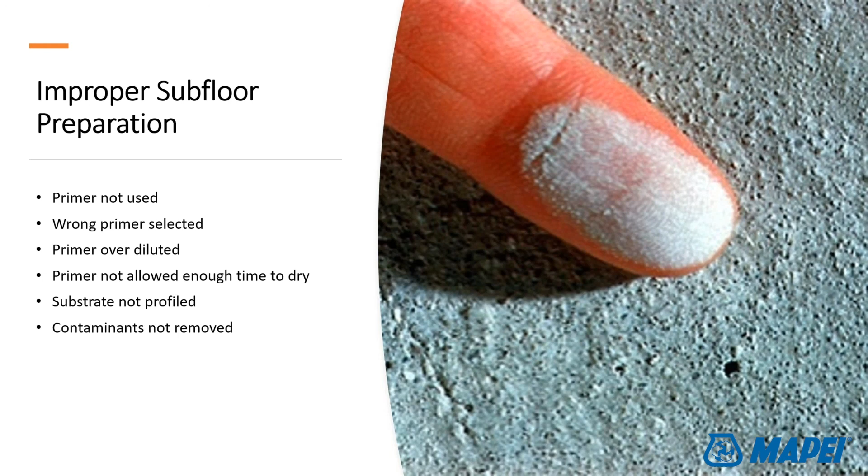Excessive moisture rates and emission rates are a problem. If you don't do the moisture testing, not only will that cause issues with the leveler you install, it will also impact the adhesives and flooring installed on top of it. So it's extremely important, even with today's high moisture resistant adhesives, to understand the moisture conditions of your concrete slab.

If you don't want to waste your time worrying about that, install a moisture barrier, and then you'll never have to deal with it again. Also, high pH will degrade the primer you're using.

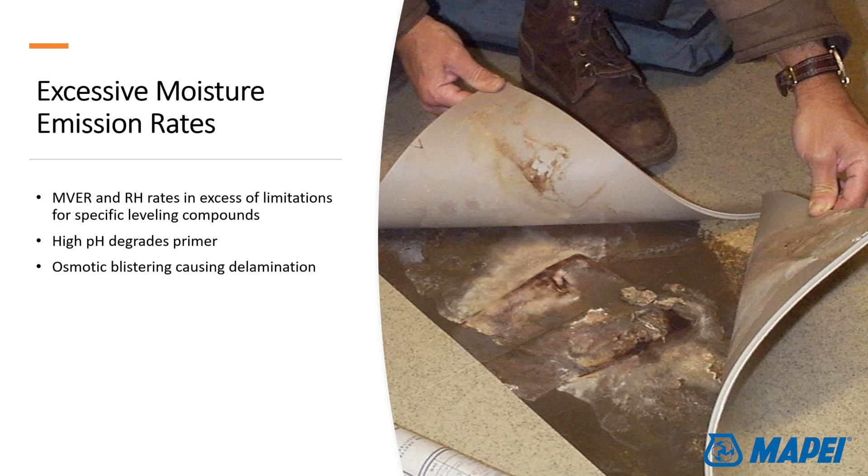High pHs in the area of 12 or above can cause these primers to disintegrate, if you will. That's not a good situation, and it's also indicative of a high moisture condition. Osmotic blistering can cause delamination. That's a whole other seminar in itself to talk about causes and cures for osmotic blistering, but we've seen that happen as well.

Improper mixing is one of the most important aspects of a self-leveler application, which I really need to spend more time talking about. Read the technical data sheet for the leveler you're choosing and stay within the range of the water ratio provided. Do not decide on your own that it's too thick and add another quart of water to thin it down. That's going to cause you some problems.

Those problems will result in what you're seeing on the screen. You can also see separation of the fillers. You're going to wind up with very thin stuff on the top and sandy stuff on the bottom. All of that's a definite no-no for self-leveling underlayment application. That will be a problem.

So do make sure you use the right water ratio, use the right water temperature, and make sure you mix it for the right amount of time. Again, all of our technical data sheets will tell you how long they have to be mixed. That's there for a reason. All the good stuff takes some time to blend out. If you mix it too short, you'll wind up with bumps in the surface, flecks of things that you don't want to see. So do make sure you mix it properly.

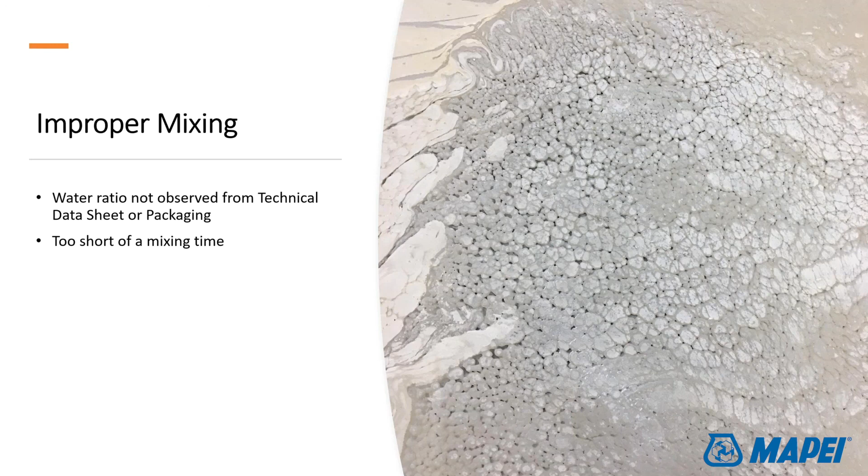Lack of protection is another reason for failures. If you put this in direct sunlight without protection, you can surface flash cure at the top of the leveler and wind up with an alligator looking skin. It'll crack on you. Excess wind or air conditioning movement is also an issue. I've seen an installation poured right underneath an air conditioning vent, and you could see the ripples of that air blowing the material out, all of which had to come back and be resanded and abraded, an additional waste of time.

Freezing conditions are also very destructive for a self-leveler underlayment. So, for example, if you're installing it at the lower end of the application spectrum, which in many cases is 45 to 50 degrees up to 90 degrees Fahrenheit, if you're at that 45 range, pour a leveler in the evening, and the building is not air conditioned or heated, everything freezes. The water remaining in that leveler will crystallize and blow the thing off the floor. And obviously, try to keep Gracie from walking on all that work you've done as well.

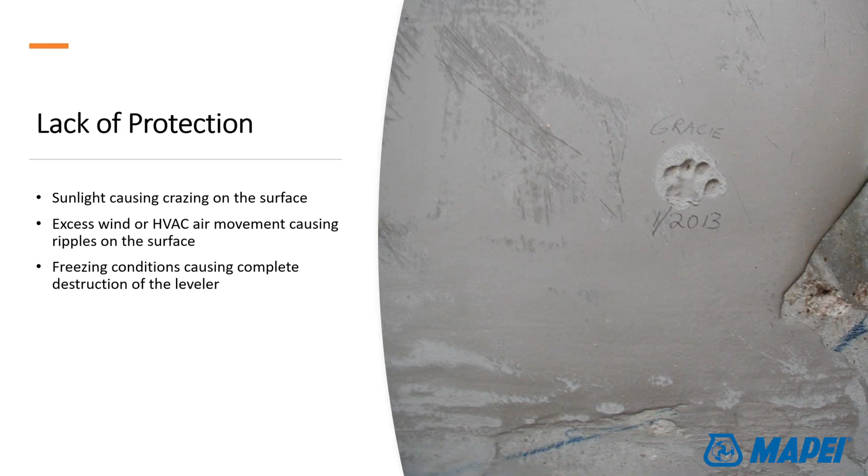So, in summary, there's a lot we've talked about in terms of navigating this vast ocean of selections for levelers. What they do is provide a typically fast and consistent method for creating a flat surface over large surface areas. They're uniform substrates for virtually all floor covering types, carpet, resilient, wood, laminate, you name it. They're a means to correct surface defects up to 2 inches, in many cases 4 inches in a single lift or more with aggregate extension. The keys to successful installation of a self-leveler are selecting the right leveler for the flooring system and the traffic you're going to be exposing it to.

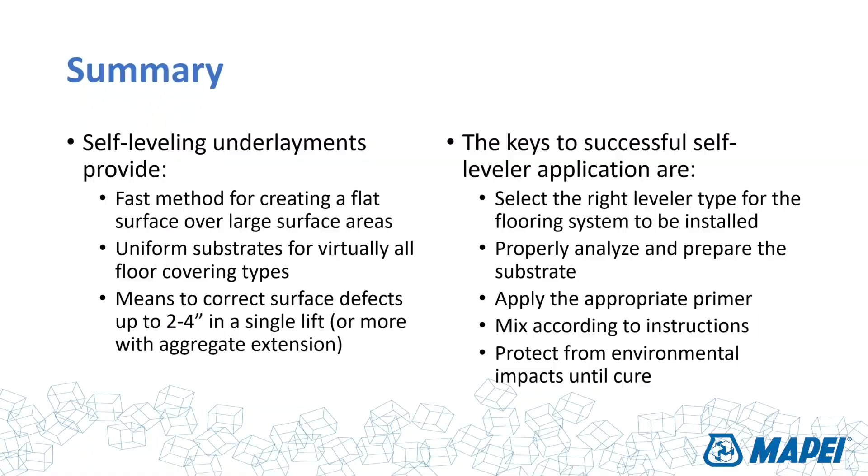Properly analyze and prepare the substrate. Apply the appropriate primer, following all the instructions given on the technical data sheet or the packaging. Mix everything according to the instructions, and protect it from environmental impact until it's fully cured. So if you follow all that, hopefully you'll be dealing with smooth sailing on your next installation of self-leveling underlayments.